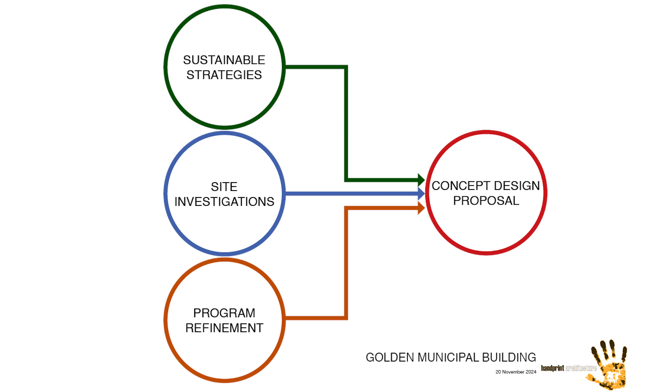It's been about 3 months that we've been working with the city, and the design team has been working on 3 parallel tracks. We've been working pretty aggressively on defining sustainable strategies for the project. We've been looking at the site in a lot of detail, understanding the opportunities and constraints there. We've been looking at the program document provided to us, making sure we understand the scope and the needs of the city. And that's all fed into, along with input you guys have provided through previous engagement activities, a concept design proposal.

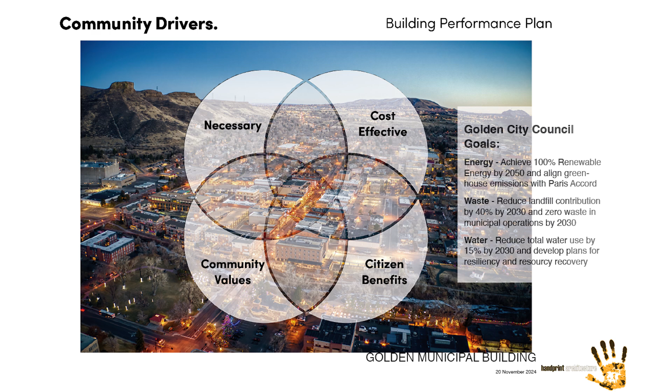So we started with sustainable design strategies, really looking at what is going to have the most benefit to the community, what the community has already adopted, what Golden City Council has already adopted in terms of reducing energy waste and water use.

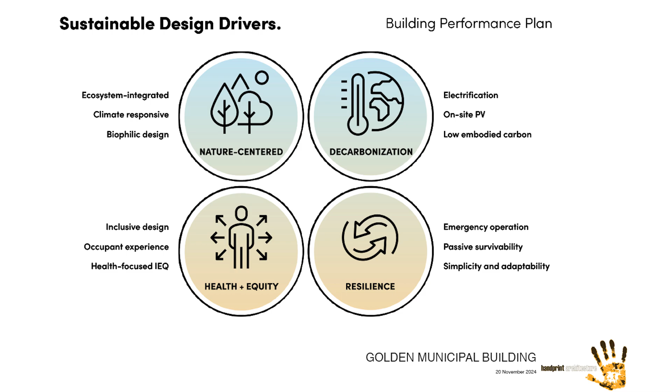That fed into sustainable design drivers that are project specific. A lot of this is around being nature centered - that's come up as a theme in community engagement activities. Health for the users of the facility, health for the community. Decarbonization, primarily driven by electrification of the building. And then resilience - not only because it's a police station as well as City Hall, but also flexibility for the future.

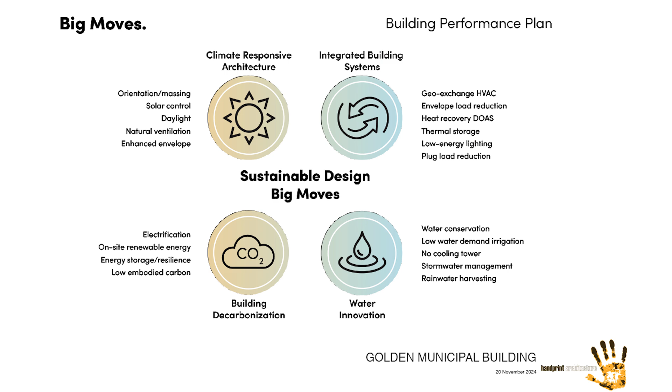Big moves start with passive strategies. We've really focused on that - orientation, massing, a really great envelope. And then looking at equipment and technology that can support that: electrification, PV, water conservation strategies, those kinds of activities.

The big move we made is we set a really aggressive energy use intensity target - this is how much energy we're going to plan this building around. Currently, City Hall, as an example, their EUI is 140. We're projecting 23.7.

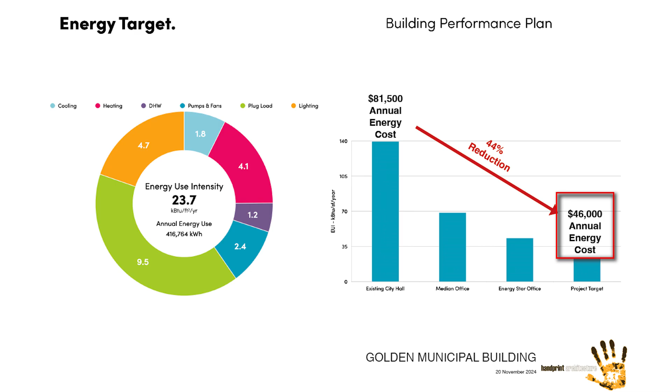What that means is instead of $81,000 a year in energy costs, we will spend $46,000 a year. That's a phenomenal savings, even though the building has increased a little bit to support the police department and some additional community space.

For costs on this, we've been looking again at passive strategies - not equipment, not mechanical things, not technology. We've really been looking at how we can make the building operate in this environment as effectively as possible, and then support it with some additional technology like photovoltaic panels. That reduces our first cost, the construction cost, and then there's a significant savings in operation costs.

We're being really aggressive, especially the city, in looking at grant funding opportunities to support this as well. Xcel has some grant programs, the state does, as well as some federal funding opportunities.

Next, we looked at site and studied the opportunities and constraints there. I'm going to go through this very quickly. A lot of this was looking at the site in context with the Heart of Golden Master Plan. We really wanted to make sure that what we're doing with the site supports that master plan and the long-term future. So we looked at public access and circulation.

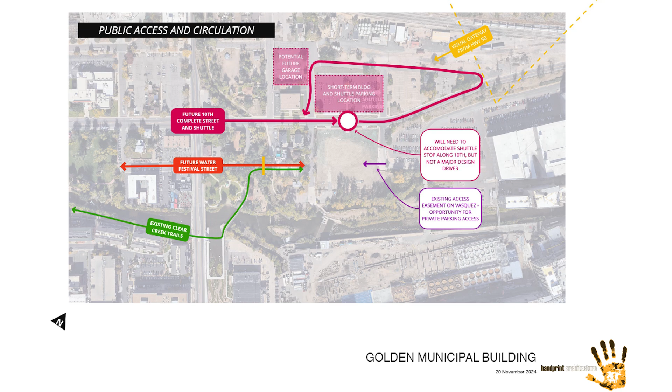We looked at existing vegetation and typologies, especially the riparian ecosystem along the creek, which is really important to us. We've looked at recreation opportunities, how this can fit into the master plan, how it ties to Vanover Park and future green space.

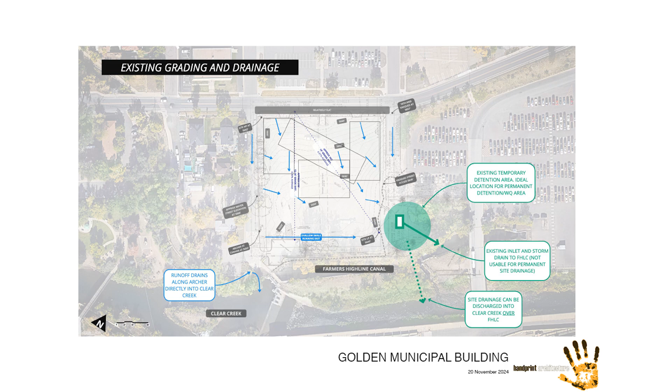We've looked at existing grading and drainage. It's a steeply sloped site, so there's some opportunities with the way it's sloped and how we can take advantage of that. We looked at context, barriers, and constraints.

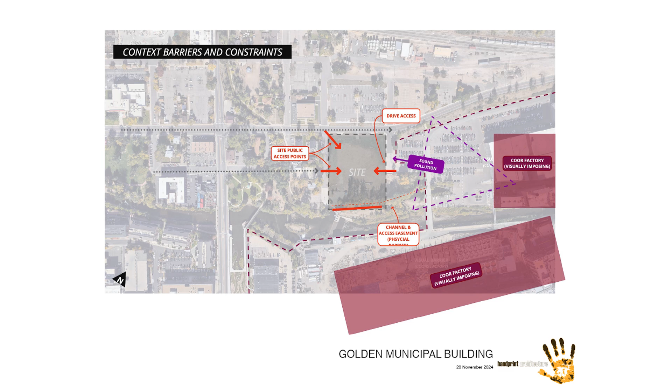You know, Coors is not the most appealing visual, but right behind Coors there's South Table Mesa. So how do we take advantage of view corridors and really support that in the design?

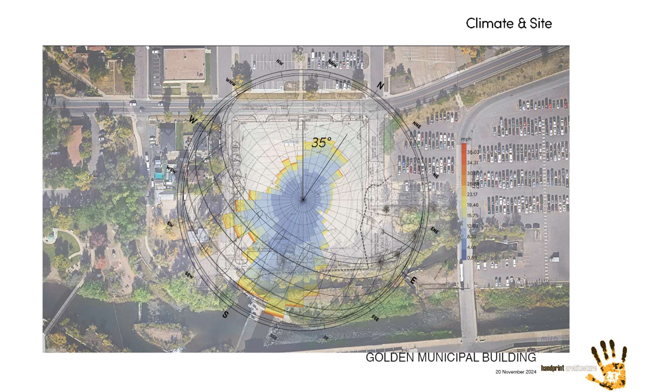We looked at the solar angles. We looked at the wind rose for natural ventilation and daylighting. The most interesting thing that got us a little cattywampus right from the start was that north is not along the street grid. It's 35 degrees off, which was a real eye-opener for us.

It's a little bit unexpected, even though downtown Denver is off north as well.

And then finally, we're on the creek, so we know we're going to have floodplain. That's an important consideration given the fact that we've got what's considered an essential facility, so it can't be in the floodplain, can't be impacted by those issues.

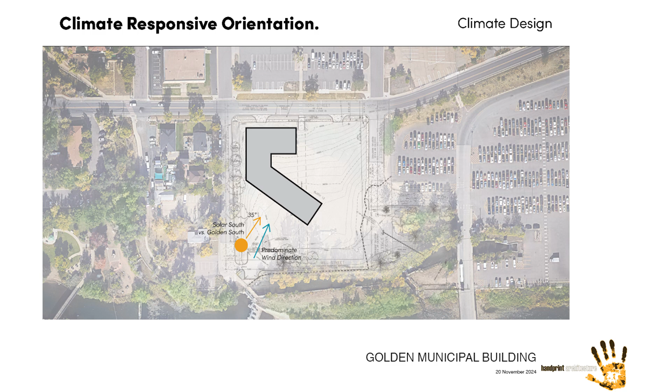And what that's led us to is a building footprint orientation that both honors the grid of Golden at 10th and Archer, but also really supports great solar control and great daylighting opportunities for natural ventilation.

And then we looked at the site, we were looking at natural landscapes, native landscapes to Golden - colors, materials, textures, plant materials, the ecosystems that are present in Golden and that will thrive on this site. That led us to this site plan, which we shared last month.

So for those who were here last month, you've seen this.

The primary drivers for the site plan - we built really great connections for pedestrians from the creek path, coming up from the south to the West Entry Plaza, from the urban context, coming down from 10th and Archer down to the West Plaza from across the street, coming down through what we're calling the North Connection into the East Entry Plaza.

And we're really leveraging the slope of the site so that we've got parking that can be elevated and accessed off of 10th that then connects to the East Plaza. And then we've got secure parking underneath that's accessed off of Vasquez.

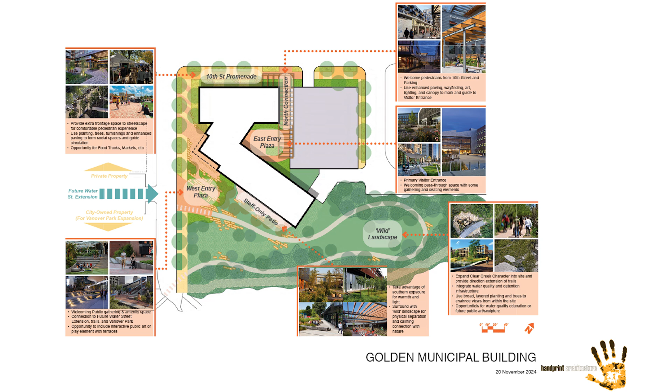Then the third track - how am I doing on time?

Third track was program, really making sure we understand the project scope. So we started with design principles, pulling that from the program and from conversations with folks in the city. We set up design for the community, design for the environment, design for safety, security, and efficiency, and design for innovations as the lens we'll look at this project through as we continue to develop it.

We spent some time - I'm not going to go into a whole bunch of numbers, but we spent a lot of time with numbers, making sure we had all the parts and pieces correct, that they were current, and that they still matched the program and the budget requirements we're being held to.

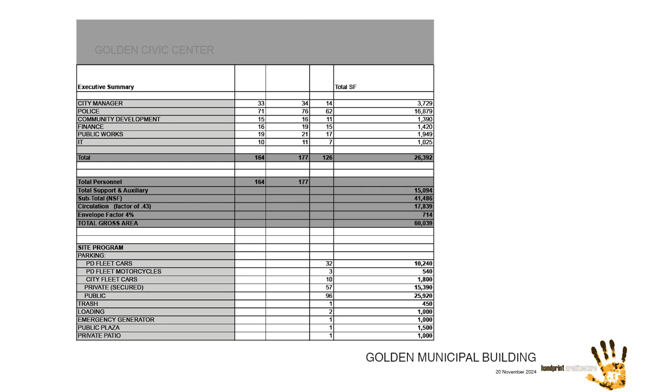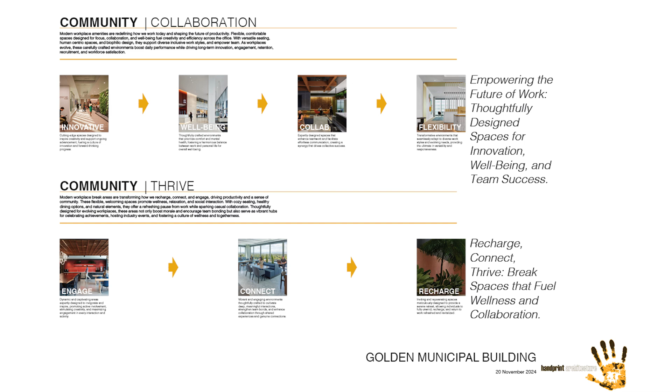We looked at workspace and what that looks like - private offices, workstations, meeting spaces, how we can help people connect, how we can use meeting spaces to connect with the community, how we can use casual meeting spaces in the building. And then we looked at community spaces for collaboration, for engagement, for opportunities for the occupants and the community to thrive as part of the users of this facility.

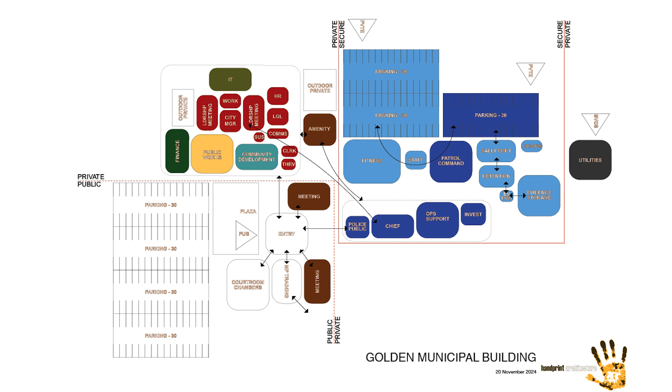And then all of that we dumped into that footprint that we shared before, so this is how it's all mapping into the footprint.

So at the lower level, which is a partial basement - sort of a walkout basement - we've got the secure police functions, utilities and storage, things that don't need windows and light.

And then as the building works its way out of the ground, because it's sloping down, then we've got patrol functions, fitness functions, the police workspace. And again at this level we've got our secure fleet parking for the police department, and some assigned parking as well.

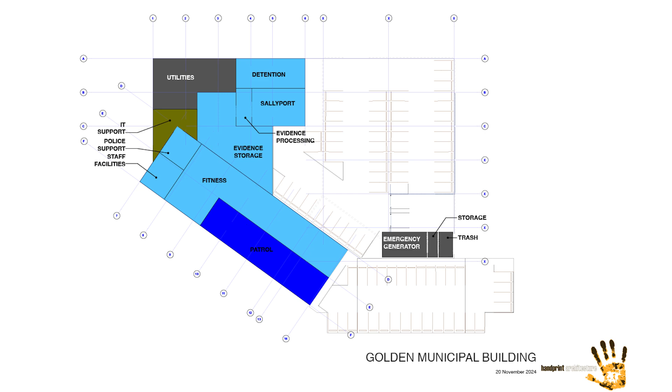On the street level, we've got all of the public functions - this is really everything that you as the community will need to access on a regular basis.

So we've got the lobby, right off the lobby we've got some meeting spaces. We're envisioning that the lobby can include some casual seating areas where you could meet with people one-on-one in a casual framework, but there's also meeting rooms.

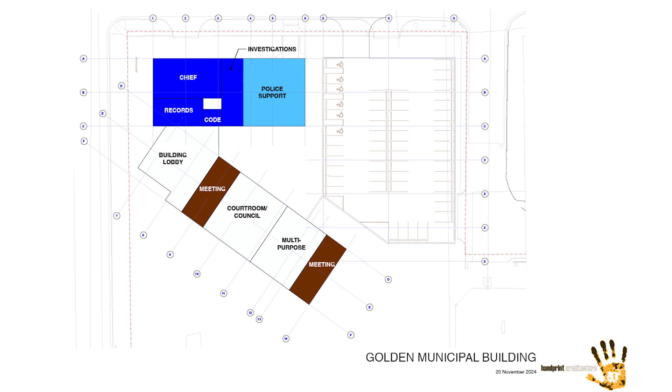So if you needed to meet with a planner or something like that, you could meet right off the lobby. And then you've got courtroom and council right off the lobby, as well as the multi-purpose room for community events and community use. And then we've also got the remainder of the police department, especially records, which is sort of the public-facing component of the police department. So that's all off the lobby.

And then on the upper level, we've got the city hall functions. And again, we've got meeting space right off the lobby on that second level so that we can engage community really effectively, really efficiently.

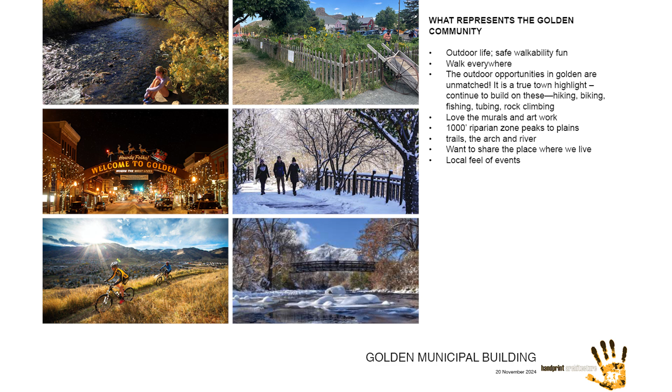So I mentioned that we had been sharing this with the community along the way. So we have spent some time asking what represents the context, the character of Golden, what's the architectural character of Golden, and a number of themes came through. And a lot of it is there's a scale to Golden. It's smaller scale. It's not big buildings. It's small, intricate, really lovely buildings, not big, grandiose architecture.

It's walkable. It's got a lot of nature surrounding and integrated into the city. And all of those things are things that we want to maintain in the design of this project.

And then another big theme that has come back through in all of this is that we really want to make sure that we're designing for the residents of Golden, right? There's a lot of tourism in Golden, and that does not want to be the primary audience for this project. The residents are the primary audience for the project.

So as we worked our way into developing an architecture for the building, we looked at a handful of other images to look at texture, entry, materials, color, scale, how we use brick. We sort of decided early on that we wanted to use brick, how we can use wood. We'd like to use wood in this project in a variety of different ways, and how all of that can impact the design.

And so I've developed these preliminary images. We're pretty early along in the process. This one, looking from 10th and Archer, shows that this is a two-story building, right, which really fits in the scale of Golden. It's got a nice presence on the corner, so it's honoring and extending that urban context.

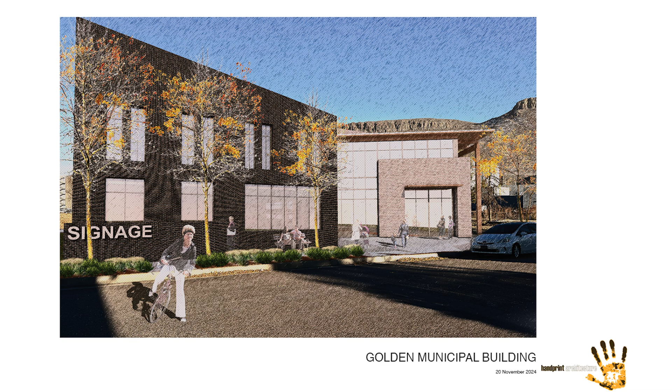As you work your way south along Archer, this is the main entry lobby with the building on the left. We've got sloped roofs that support the PV, but also create that sloped roof architecture that is contextually appropriate. And then we've marked the entries with this mass of brick and used wood here at the entry to make that a special place.

Continuing on further south, this is now looking back up from the creek. You can see the two-tone character of the design, right, where we're using dark brick that really anchors the building into the ground and creates a base for the building. And again, the lobby with a nice brick mass that marks entry and is articulated with the wood to give it some nice character.

Also the window patterns, which aren't finalized at this point, but sort of the character of that, right, which is punched windows. That's how the historic architecture in Golden is, it's punched windows. It's not necessarily big expanses, but then marking some special locations like outside council chambers.

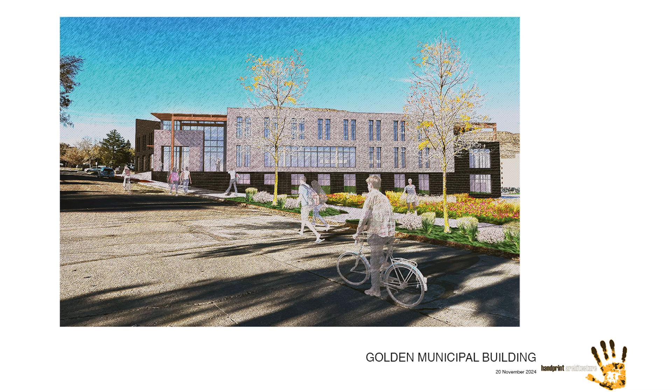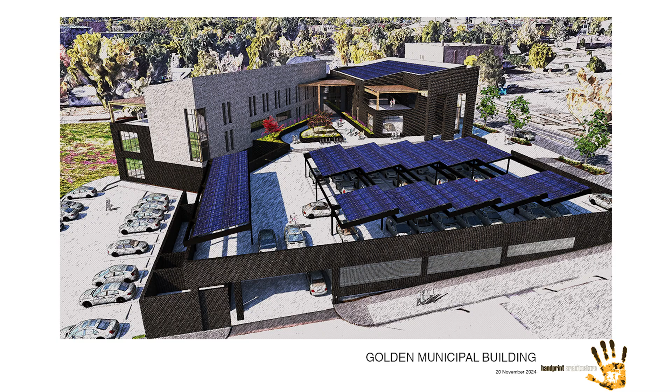So now we're continuing all the way across to Vasquez, looking as if we were flying a drone, across to the east entry and the parking deck. You can see how we've taken advantage of the sloping site, so that deck is actually at street level. It's not an elevated parking deck, and that makes it a really efficient and cost-effective parking level, and then secure access is below. You can see a lot of PV.

We don't need all this PV. We're looking here at what the opportunities are for where we can place PV. So we can place PV on the parking garage, we can place it on the sloped roofs. There's a lot of opportunities to capture the PV that we need to offset the energy that we're using.

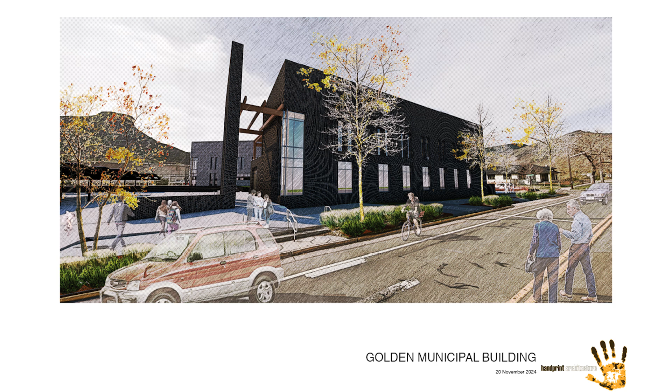And then a great entry space off the east. So we've got a morning plaza on the east, and an afternoon plaza on the west. And then looking across from 10th, you can see the connection that we built to cross the street that takes you right into the East Entry Plaza. Again, the punched windows, a little bit of a special articulation of windows at the stair that's in there.

And that's the work that we have done in a very, very brief and abbreviated time frame.